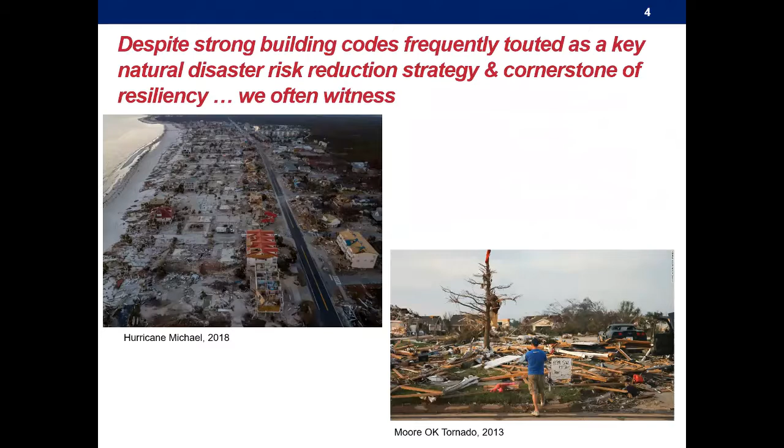So, of course, codes only apply to new construction, not to a lot of the existing construction that's been in place. But in regard to the codes themselves, there's a lot of variety. This is especially true in the U.S., where codes are implemented at the state or locality level. There's been a push towards trying to make building codes more uniform, either within a state or across states, through the adoption of model codes such as the International Residential Code, the IRC. This is some data to give you a sense of the variety of codes in place. For these 1 to 2 family dwellings, which is what we're concentrated on in this work—we're not looking at commercial losses—36% of states in the U.S. do not adhere to a uniform statewide residential building code standard.

So you could think about that in terms of geography, right, and in terms of space, but then you can also look at that in terms of time. So codes themselves are...

Updated every 3 years. So these model codes come out with new codes on a 3-year cycle, but there's a lag in terms of how those are then implemented by the states. This has gotten better over time, but as of May 2018, 51% of states are using an edition of the IRC that's at least 6 years old. So they're 6 years behind the best science, and of course it's only going to impact homes moving forward, but you have that going backward in time as well.

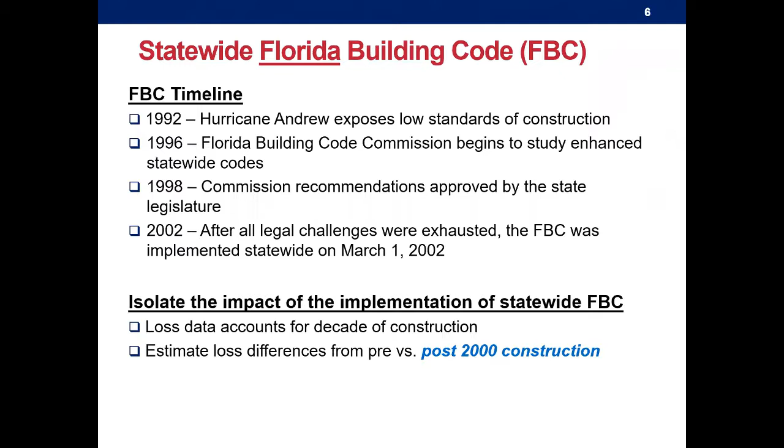So that's part of the methodology here. You can look at the raw data and get a sense of that, and you might have seen some other reports that do that, but we wanted to run statistical modeling so that we're also controlling for all the other aspects of what could drive losses. We'll come back to that CAP modeling framework in the next slide to understand specifically what is the impact of having this post-2000 construction given windstorm losses from 2001 to 2010 in the state of Florida, looking at pre-2000 construction versus post-2000.

From this framework—hazard, exposure, vulnerability, and loss—we do have loss data that we were able to get from the Insurance Services Office, ISO, which is a subsidiary of Verisk. They gave us their realized insurance claim data over the years 2001 to 2010. So that's what we're going to be modeling.

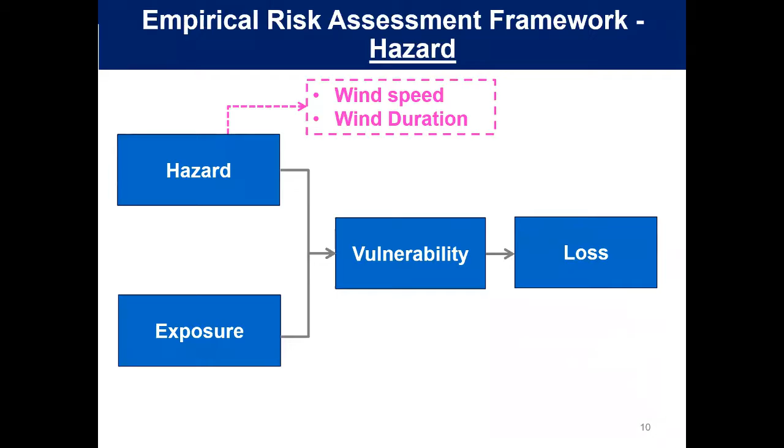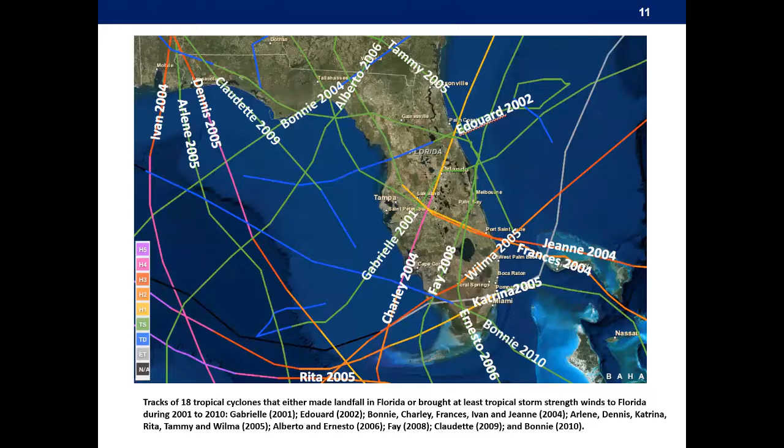This is where James Done, importantly, plays a key role in our work here. There were 18 storms that happened in Florida during that time frame. This is just a picture of their tracks and the areas of the state that they hit, which is pretty comprehensive.

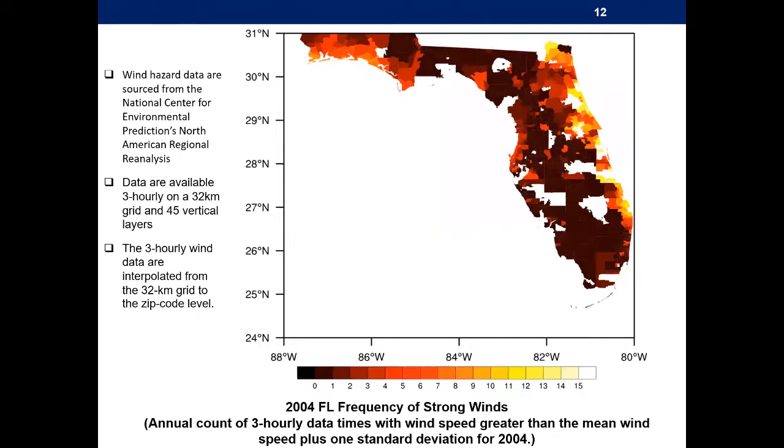So we're collecting data on that, and capturing it from this National Center for Environmental Prediction hazard data that's available. It's gridded data, and we're putting that to the zip code level over time so that we can use it in the analysis to try to understand its role as a driver of the exposure loss.

From the exposure standpoint, these are just some of the variables included: housing unit density—you would expect that the higher and more dense the zip code is, the higher the losses would be. Whether or not mobile homes are present, and by how much, is again a driver of loss. Higher income—there's been some work showing that could lead to lower hurricane losses due to people self-protecting, but not necessarily all the time.

Of course, the more policies that are in place, the total premiums are a function of the value of the home, as well as just the number of claims.

From a vulnerability perspective, outside of the year of construction, the decade data that we have, which we also got from ISO, and some other vulnerability factors in terms of building construction, we're looking at what could be a risk factor in terms of the zip code, whether that be a coastal county versus an inland county.

We're trying to understand, during this time frame, a lot of the market was transferred to the residual wind pool and Citizens, and how much of that was transferred over, which would be an indication of maybe a more risky area because insurers would be less willing to underwrite there. So we're trying to control for that in the modeling too.

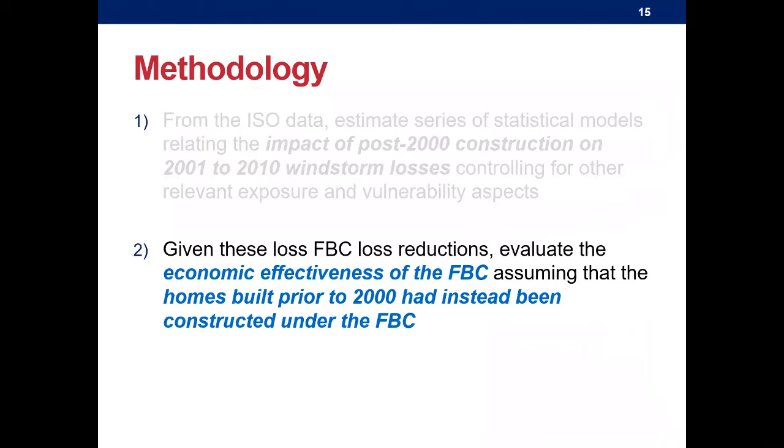Maybe that's not so much of a surprise since you hear that touted all the time, but really where we wanted to take this next was: given that you're seeing this reduction in losses, how economically effective is it? Coming back to the point from the beginning about whether putting building codes into place is affordable—there's a cost to implementing the new code. So we wanted to understand the reduction in losses relative to that cost, to understand the economic effectiveness of the code itself.

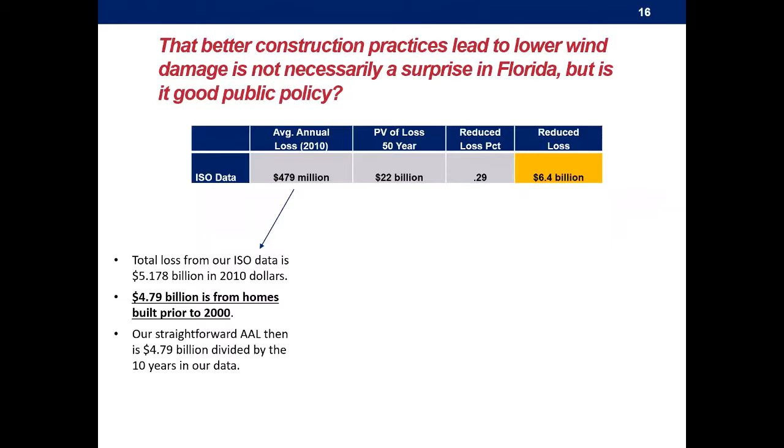So this is a high-level way of thinking about this. We have this $5 billion in losses, and nearly 4.8 billion of that is from homes built prior to 2000. We derived a straightforward average annual loss by dividing that by 10, giving $479 million per year. Then we take this out over time, assuming a 50-year life and adjustments for inflation, etc., for homes built prior to 2000, and we get a present value of future losses of $22 billion off of that $4.8 billion over the next 50 years.

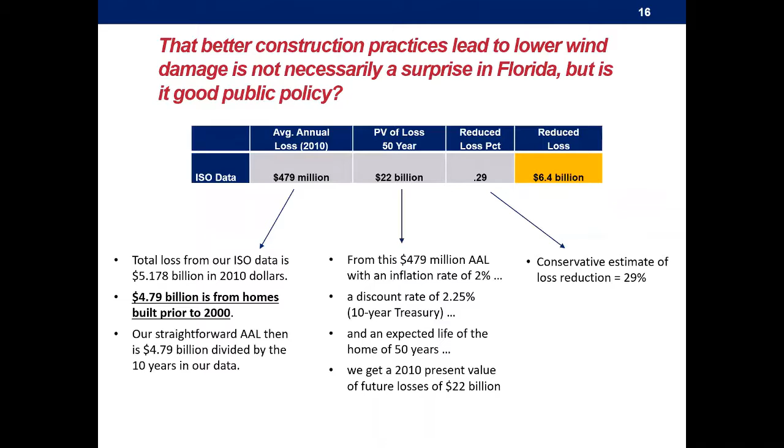Now, I had said in the previous slide that the loss amount we found was about 72%, and that the typical range is around 40 to 60. Here we're just taking this conservative estimate. If instead these homes had been built to the better code with a 29% loss reduction, this would lead to reduced losses of $6.4 billion. So if these exposures had been built to a stronger code, you would have saved $6.4 billion over the lifetime of these homes.

So then we wanted to compare this to what it would cost to do that—what it would cost to move the pre-2000 homes to meet the FBC standards. We got cost data from an Applied Research Associates study from 2002, and roughly the cost per square foot to meet the FBC is about $1.50. We did sensitivity analyses around this, and there's nearly 800,000 homes that would need to do this at an average of about 2,200 square feet. This costs an additional $2.8 billion to meet the codes.

So just by looking at it that way, this gives you back $2.25—a benefit-cost ratio of 2.25, or for every dollar spent on implementation of the FBC, $2.25 was saved in the form of reduced windstorm losses. Anything greater than 1 from an economic perspective is meant to be economically effective, and we're showing that benefit-cost ratio greater than 1 here.

In the paper, we go through a whole host of scenarios to test the sensitivity of these results, and we find that on average, across all these scenarios, the benefit-cost ratio ranges anywhere from 2 to 7.93. Some of you may have seen other work from the Multi-Hazard Mitigation Council—it used to show a 4 to 1 savings, and they had a recent update this past year showing 6 to 1. So our estimates fall within that range. The other way we thought about this is, if you have this reduction in losses, how long does it take to get the cost paid back? It's about 8 to 9 years.

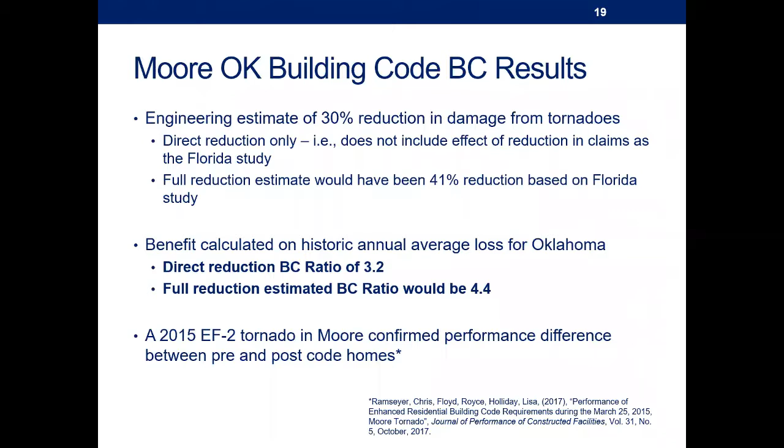We're looking at Moore, Oklahoma. After the Moore tornadoes, they had implemented a stronger code there, and you can kind of abstract away from this direct versus full reduction - it's just different aspects of modeling, whether we're only looking at homes that had losses themselves or looking at the entire impacted area. But basically, in Oklahoma, with codes that were not for hurricane but for tornado, there's this economic effectiveness, with BC ratios of 3 to 4, to build to stronger construction to meet standards and protect yourselves from tornadoes.

And of course, coming back to this affordability question, the concern would be that there would be a drop off in housing starts or housing built in different areas. So they put together this comparison looking at Norman versus Moore. In Norman, Oklahoma, there was no new code put into place, and in Moore, with the new code being put into place, by comparing the two housing markets together, there wasn't shown to be this drop off in housing sales.

So this is an important point in regard to this affordability or cost question - how can you show the value of these codes? So they're economically effective, but do people want this type of building? And at least in the Moore case, they show that that's what's happening.

Excuse me there for one second. I'll just go through some other highlights of some of the other work that we had done, in three buckets here, and then the last one is focused on local implementation with the codes.

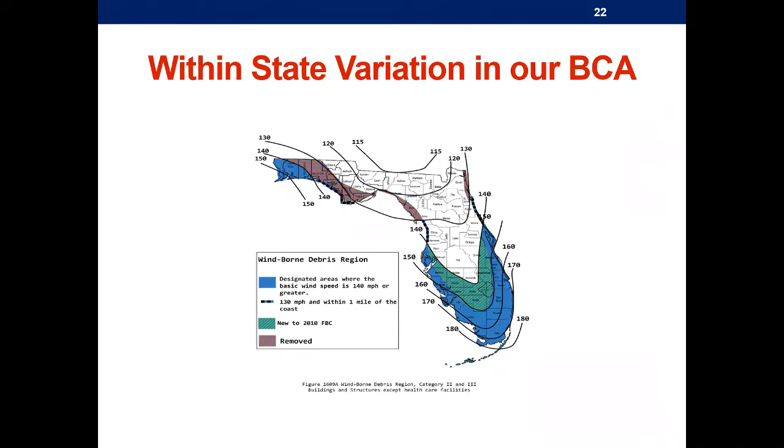So the previous analysis was looking at the overall statewide effect, a sort of blended view of Florida - this isn't the most recent version, but the state itself has different wind design speeds, right, outside of the code, and there is some correlation between the two. But the wind design does vary across the state, so we were interested in understanding what that would mean in terms of the reduction of losses and its economic effectiveness.

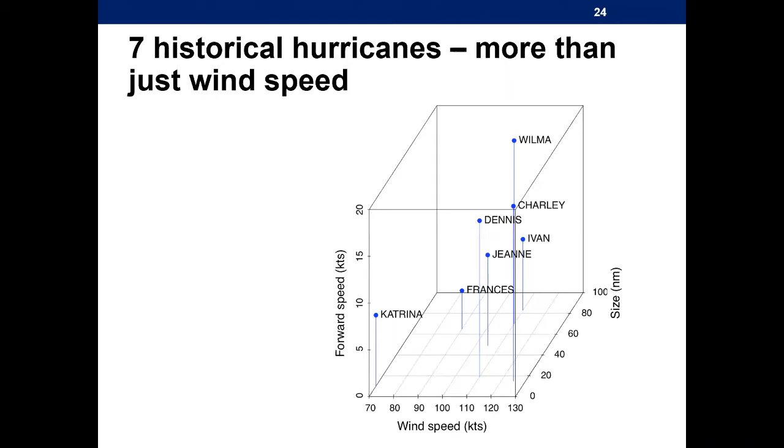So we've been trying to understand how these parameters of the wind field impact the drivers of losses. This is another paper referenced at the end, and we find that all of these things matter in terms of drivers of losses, but the code, even though it's not necessarily designed for duration of winds or directional uniformity or steadiness, as we're calling it, still takes that into account and reduces losses for those particular aspects.

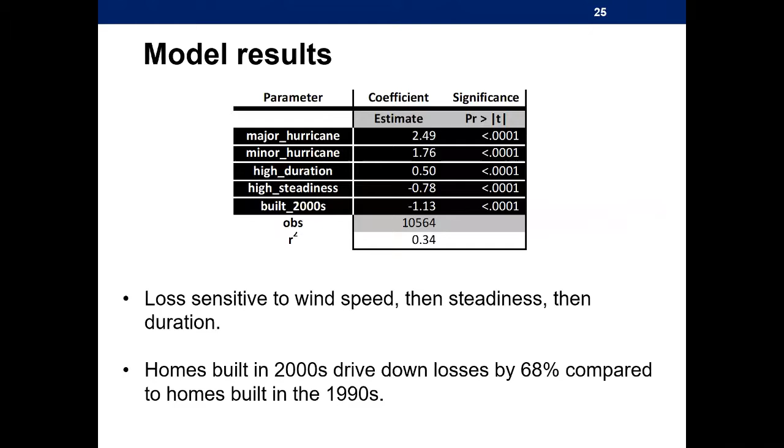The last thing I'll go through in detail is around this whole notion of enforcement. Even when you have a strong statewide code in place, codes are primarily maintained at a local level. So it's always an open question as to how well codes are enforced, sometimes implemented, at the local level. This is what came out of Hurricane Andrew in 1992.

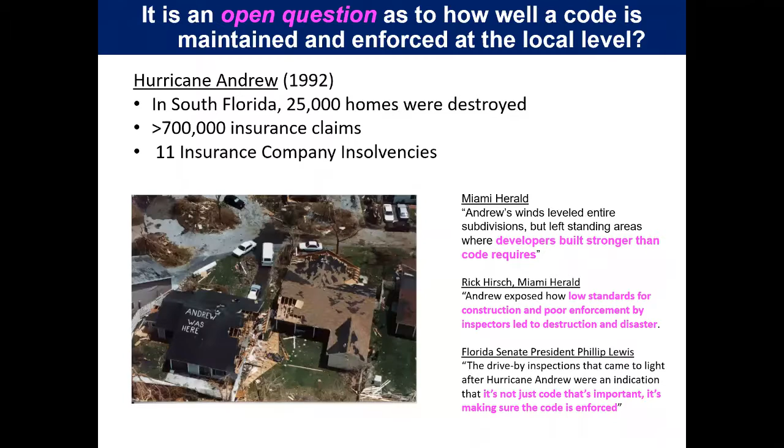They had a strong code on the books in South Florida at that time, but unfortunately realized it wasn't being adhered to at all. Andrew exposed how low standards for construction and poor enforcement by inspectors led to destruction and disaster. It's not just the code that's important, it's making sure that the code is enforced. This was a big emphasis in Florida following that.

What we're trying to understand in these analyses is not only what we call the extent of the code being implemented post-2002, or this 2000s decade of construction, working with the data we have, but not just the extensive margin, also the intensive margin at the local level — how well the better enforcement of codes relates to disaster losses from tropical cyclones and wind. We use data from ISO, the Building Code Effectiveness Grading Schedule, or BCEGS, to get at this.

For those not familiar with the BCEGS, since 1995 ISO has been administering the BCEGS in the US. I apologize to any ISO representatives on the line if these numbers are out of date, but approximately 17,000 code jurisdictions have been rated by ISO. They have a BCEGS rating from 1 to 10, where a rating of 1 is the best — this is exemplary enforcement of a model code.

Before communities can be rated, they have to have some minimum requirements in place. Some communities don't get a rating just because they're not even meeting these minimum requirements, and other communities might just choose not to be rated by ISO in the BCEGS program. Beyond these minimum requirements, there's a ranking system around the administration and enforcement of codes, review of building plans, field inspections, etc. So the codes themselves on a 1 to 10 basis are a blend of both adoption of the code as well as local enforcement within a jurisdiction.

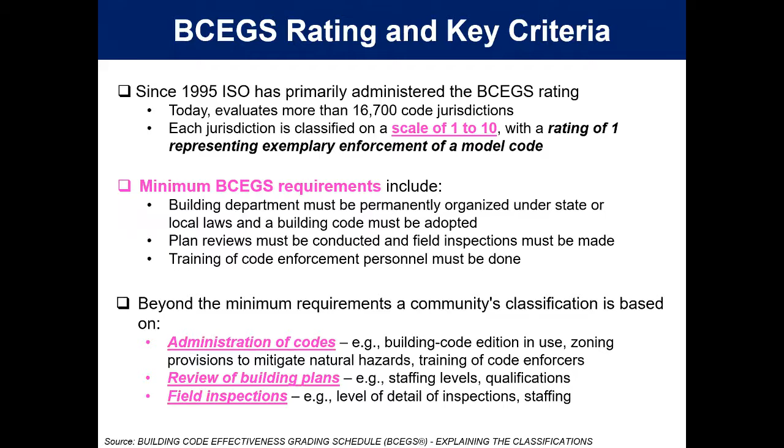So that's what we're using to try to get at how this matters in Florida. This is a snapshot from 1995 to 2015 of all the different ratings we received from ISO. What you should first notice is that even though Florida has this gold standard of a strong statewide code, there are a number of areas that do much better at implementing the code than others. It's not that every single community in Florida is a 1 because they have this really strong statewide code — there's still a lot of variety within the state.

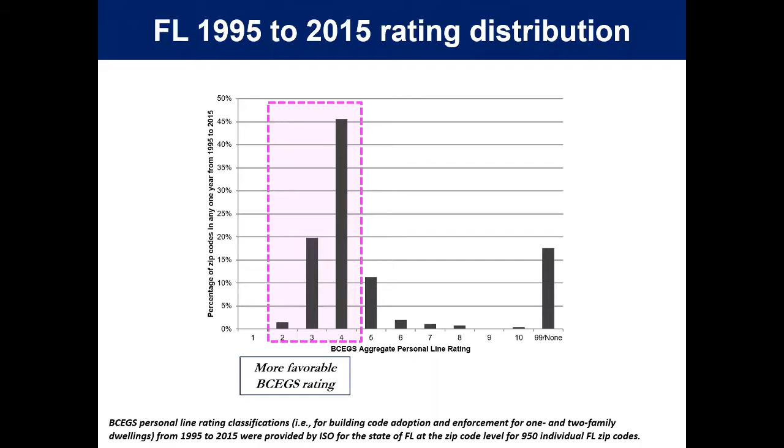You can come back to the Panhandle exemption that I talked about earlier, up until 2007. We're placing these different ratings into buckets that we called more favorable and less favorable, and we worked with ISO to try to get the proper discretization of these ratings.

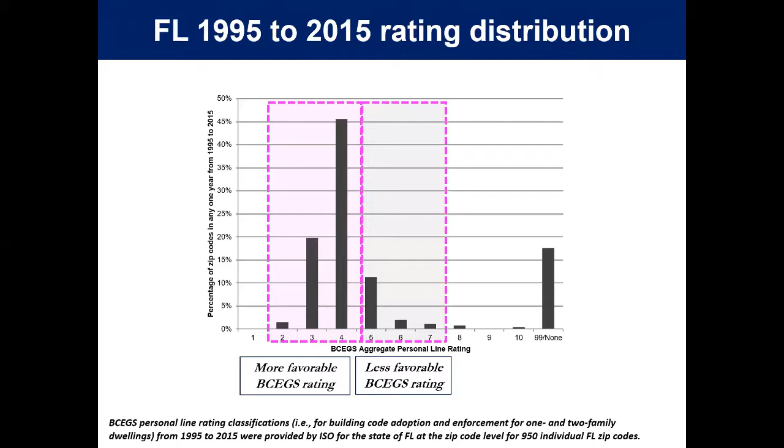So we're looking at more favorable in comparison to less favorable, as well as anything beyond a 7 - 8s, 9s, or 10s - or whether or not there's no rating at all. And these things change over time, as the communities get rated just as the codes themselves are changing over time with the 3-year cycles, at least from the model code perspective.

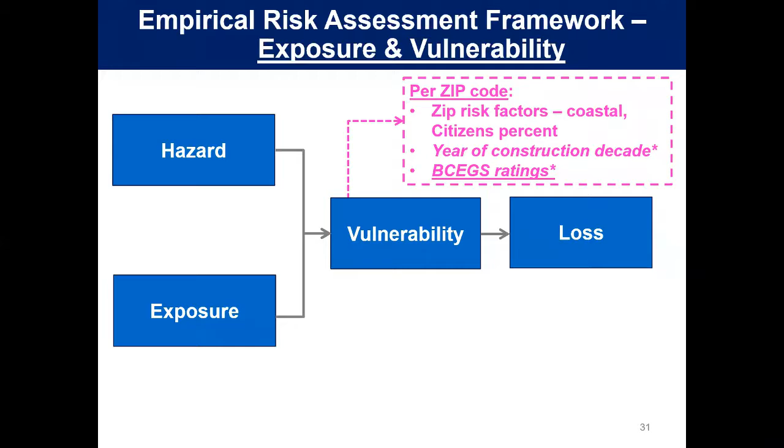So again, we're trying to understand what the role is of this local enforcement in regard to the loss. So we're going to go through the same sort of hazard exposure, vulnerability to loss estimation framework. Now not only are we including the year of construction decade, but we also have the BCEGS rating over time for that particular community, so we're trying to isolate that as well within the modeling framework.

And the first purple bullet here is, as we talked about before, windstorm losses are shown to be reduced by as much as 72%. This is the extensive margin - the implementation of the code - which is still the driving factor. But we do find that an additional 15% of loss reduction has occurred due to having more favorable BCEGS ratings in place.

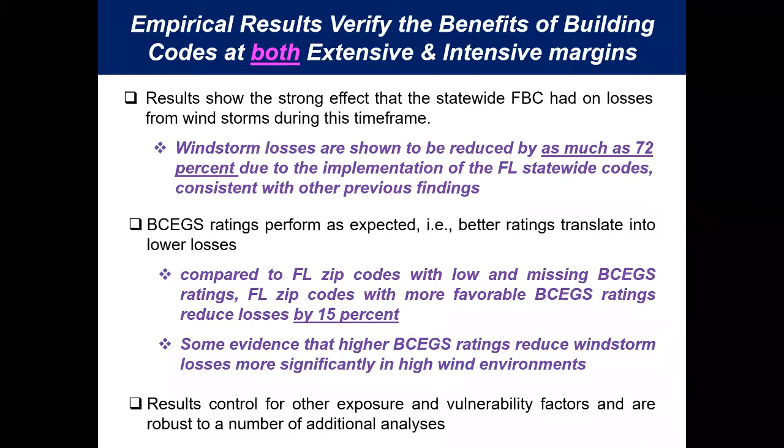So the takeaway from this is that while local enforcement might not matter as much as the implementation of a statewide code, and that can certainly change over time, it still does matter - there's a benefit to having better enforcement at the local level. And we've shown this also in other contexts, which is kind of where some of this work started out.

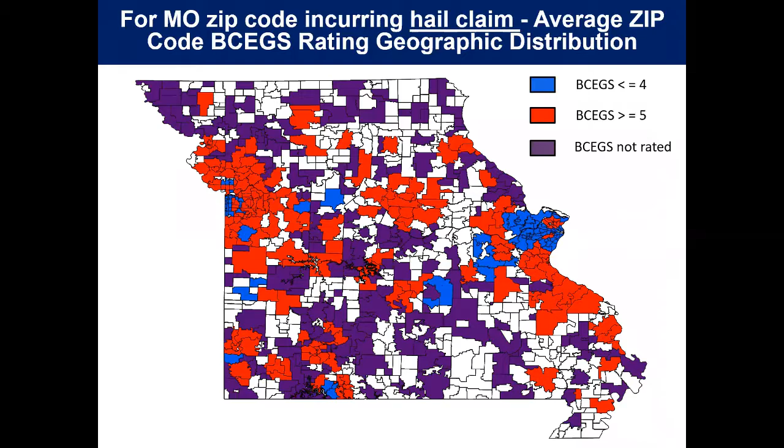This is a picture of the state of Missouri, where we did a similar analysis. Here, though, we were looking at hail losses. And again, we're using the BCEGS rating less than 4 - the lower is better in terms of better enforcement and adoption - and then greater than 5 in red, and then purple being not rated. So even in Missouri you're going to have a lot of variability within the state, more than you do in Florida, because this is a particular state that doesn't have a statewide code in place, at least not at the time of this study - a lot of it's left up to the local jurisdiction, so there's a lot of variety here within the state.

And again, we found that this mattered in this analysis, and it was on the order of 10 to 20% - in line with the 15% estimate that we're finding in Florida. And then there's just this 6 million annual savings across 4,000 impacted homes due to this better enforcement, so that's a flavor of what that would mean for different jurisdictions or communities.

So my concluding comments - I have a couple of other slides here at the end - but I think our research has shown that building codes are not only effective in reducing losses, but they also do this in an economically effective way, which is very important, because if you're trying to have support for stronger codes in a community, the argument most often against that is the increased cost of construction and what that would mean for affordability of homes. So we're trying to understand whether or not they are or aren't economically effective.

And I will point out too that we're only looking at direct property losses here. There are a lot of other benefits to having avoided losses in place - other external benefits, potentially premium discounts, and just other things in the community that matter that we're not picking up here. So it's just another aspect of this economically effective argument.

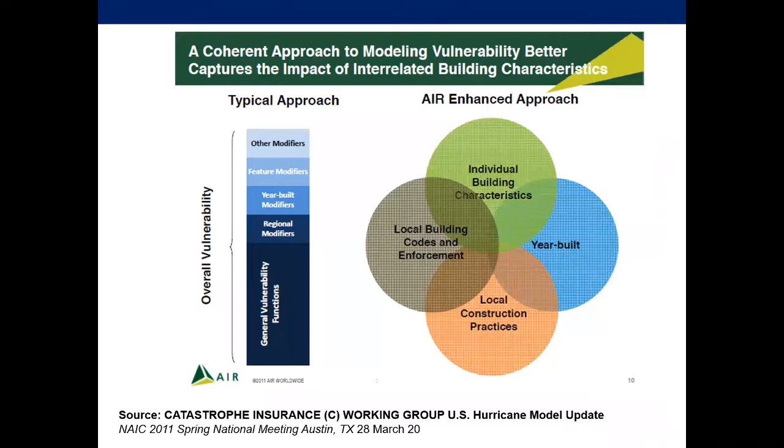This is not necessarily a plug for Verisk, which AIR is also a subsidiary of. They're a cat modeler, but for us, we've been trying to understand the role of codes within the hazard, exposure, vulnerability, and loss framework. AIR does have an emphasis on this in their cat modeling, and we've had conversations with them about our work. This is meant to inform what those reductions might look like from a vulnerability curve perspective within that modeling environment.